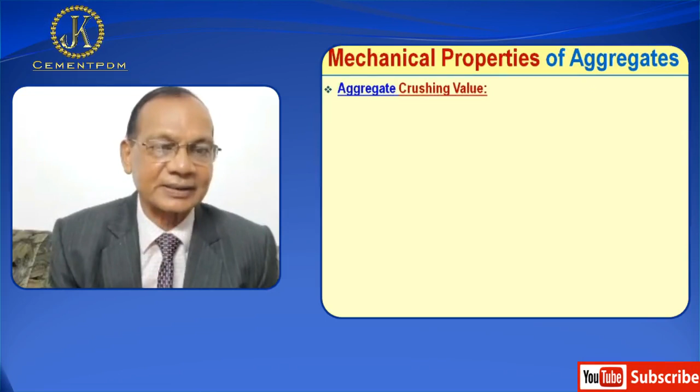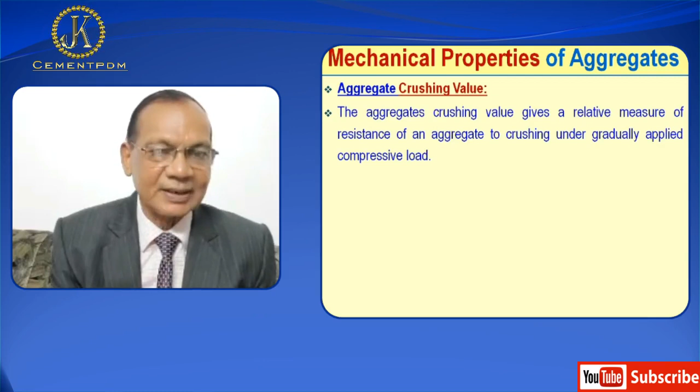First is aggregate crushing value. The aggregate crushing value gives a relative measure of resistance of an aggregate to crushing under gradually applied compressive load. The aggregate crushing strength value is a useful factor to know the behavior of aggregate when subjected to compressive loads.

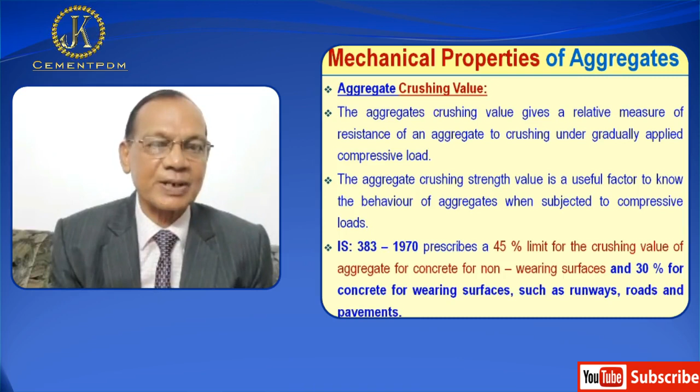IS 383/1970 prescribes a 45% limit for the crushing value of aggregate for concrete for non-wearing surfaces and 30% for concrete for wearing surfaces such as runways, roads and pavements.

Next is aggregate impact value. The aggregate impact value gives a relative measure of the resistance of an aggregate to sudden shock and impact. The impact value of an aggregate is sometimes used as an alternative to its crushing value.

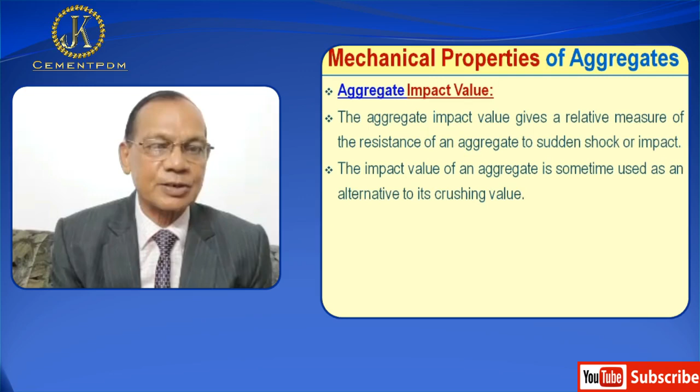IS 383/1970 prescribes a 45% limit for the impact value of aggregate for concrete for non-wearing surfaces and 30% for concrete for wearing surfaces such as runways, roads and pavements.

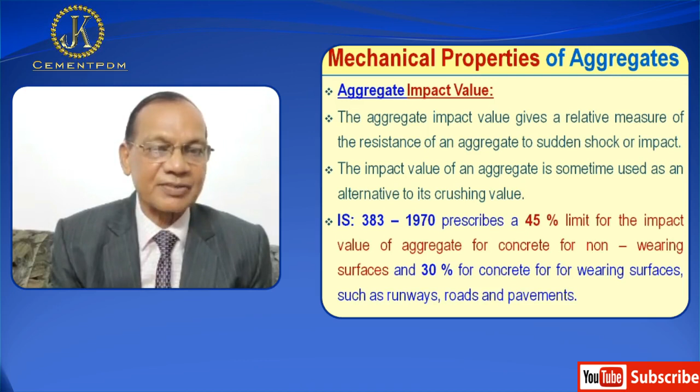Then aggregate abrasion value. The abrasion value gives a relative measure of resistance of an aggregate to wear when it is rotated in a cylinder along with some abrasive charge.

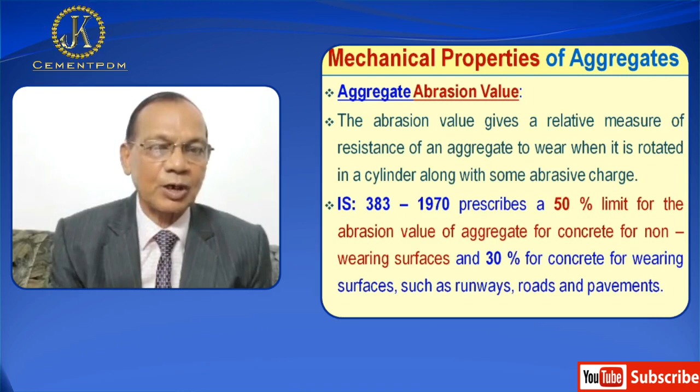IS 383/1970 prescribes a 50% limit for the abrasion value of aggregate for concrete for non-wearing surfaces and 30% for concrete for wearing surfaces such as runways, roads and pavements.

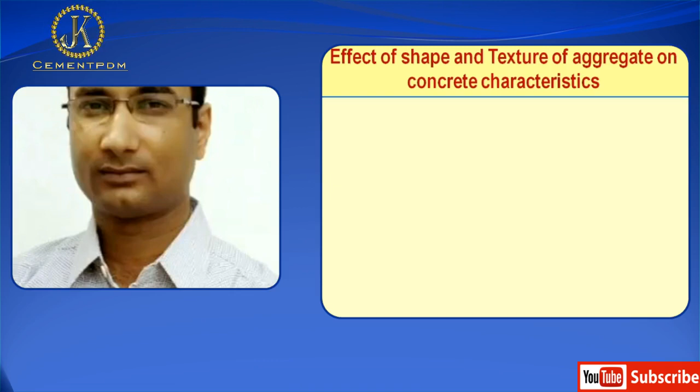Sir, can you please enlighten us about the effect of shape and texture of aggregates on concrete characteristics and maximum size of aggregates? Sure, Mr. Singh. First, I will discuss effects of shape. Shape influences the properties of fresh concrete more than hardened concrete.

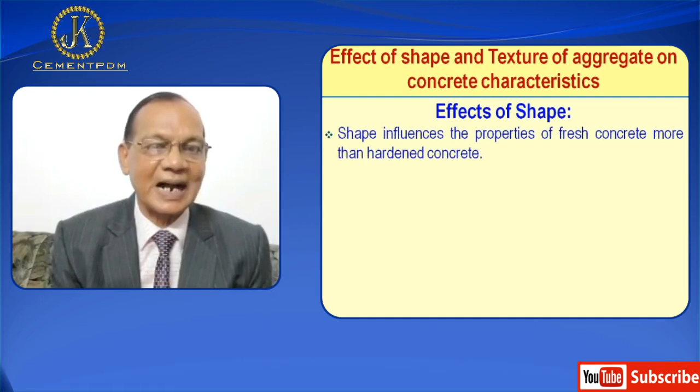Rounded aggregates are suitable to use in concrete because flaky and elongated particles reduce workability, increase water demand, and reduce strength. In case of angular particles, the bond between aggregate particles is higher due to interlocking, but due to higher surface area, angular particles increase water demand and therefore reduce workability.

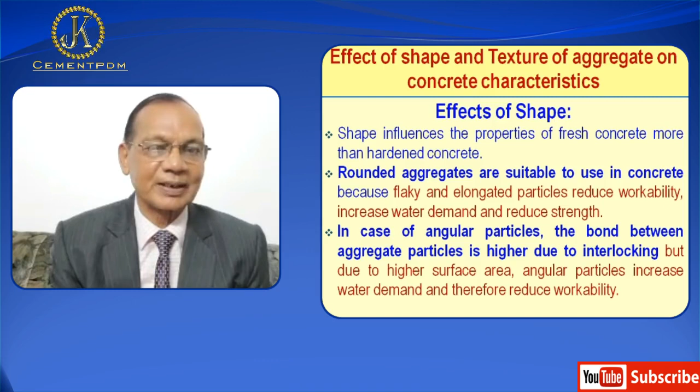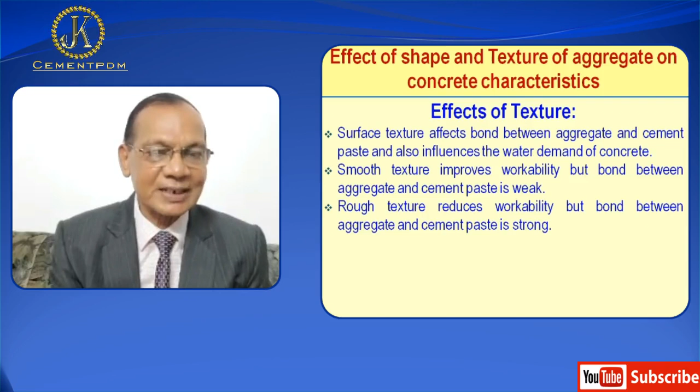Now I will discuss effects of texture. Surface texture affects bond between aggregate and cement paste and also influences the water demand of concrete. A smooth texture improves workability, but bond between aggregate and cement paste is weak. Rough texture reduces workability, but bond between aggregate and cement paste is strong.

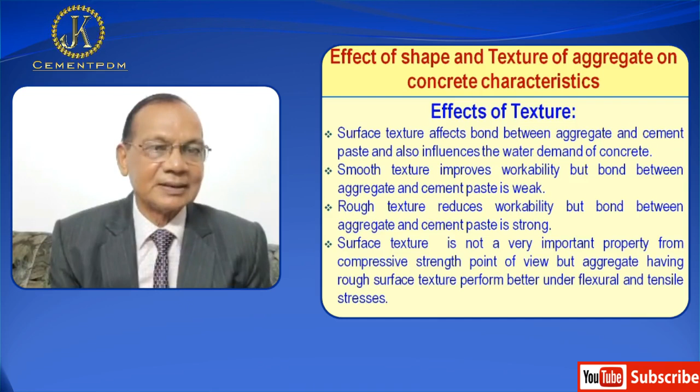Surface texture is not a very important property from compressive strength point of view, but aggregates having rough surface texture perform better under flexural and tensile stress. Now I will discuss maximum size of aggregate. In general, the larger the maximum size of aggregate, the smaller is the cement requirement for a particular water cement ratio.

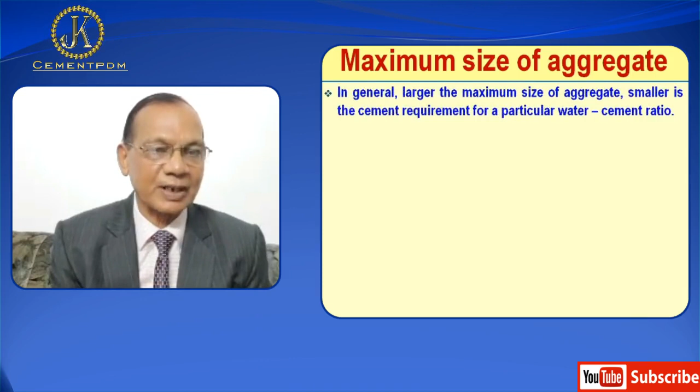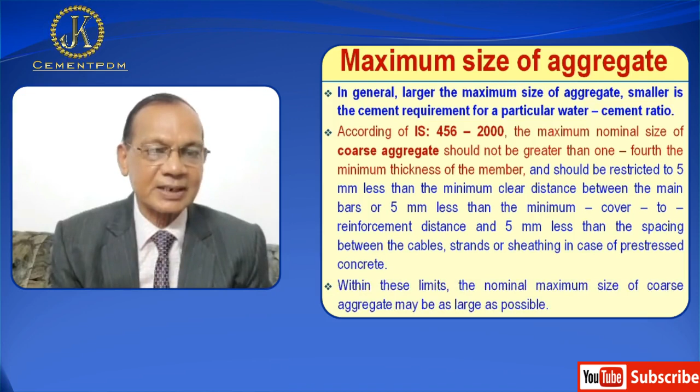According to IS 456/2000, the maximum nominal size of coarse aggregate should not be greater than 1/4 of the minimum thickness of the member and should be restricted to 5 mm less than the minimum clear distance between the main bars or 5 mm less than the minimum cover to reinforcement, and 5 mm less than the spacing between the cables, strands or sheathing in case of pre-stressed concrete. Within these limits, the nominal maximum size of coarse aggregate may be as large as possible.